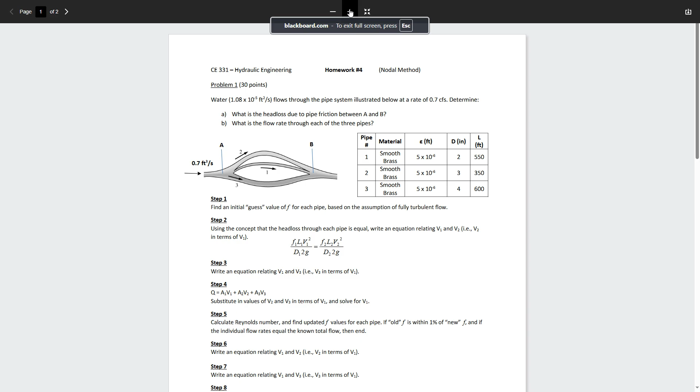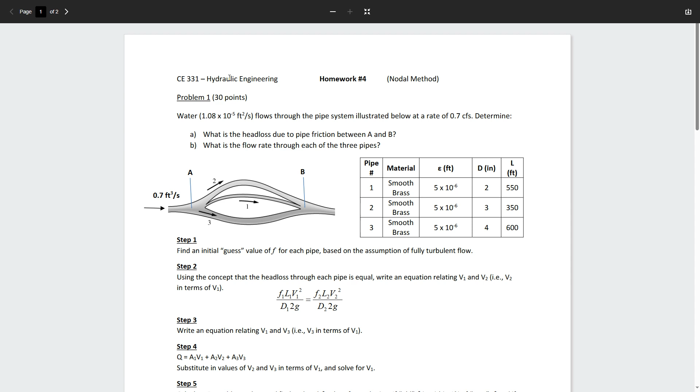Okay, so homework 4 is what you're working on, due at 11 o'clock next Wednesday. Both problems require you to apply the Nodal method, which is what we're talking about today. Homework problem number 1 has a fair amount of calculations, but it's not conceptually very complicated or difficult—just a couple of pages of calculations.

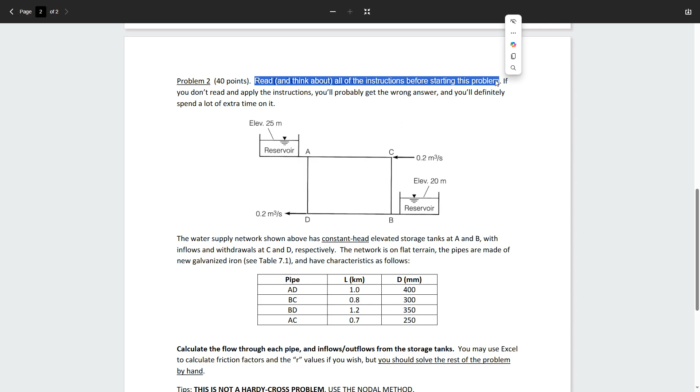Problem 2 is a little more of a brain buster, although that's giving it too much credit—it's not that complicated, really. You just have to do a step-by-step logical analysis. The first part of being successful on problem 2 is reading and thinking about all the instructions before starting. The mistake I've noticed in the past is that students just start doing calculations before bothering with the hints I've given you.

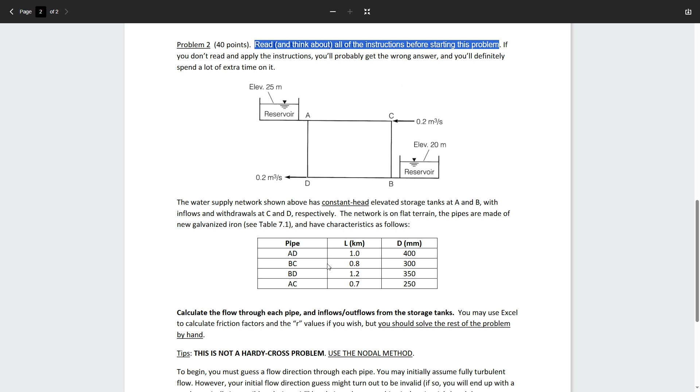This is maybe the 18th semester I've taught hydraulics, and I've assigned this problem many times, and I've seen how people crash and burn on it. In the past it was just the image, the data, and calculate the flow through each pipe. So I've looked at what mistakes people have made over the years and tried to steer you away from the most common ones by giving you hints. Everything you need is in the handout, and I really think it would be wise to read and think about my suggestions before you start the calculations rather than jumping right in.

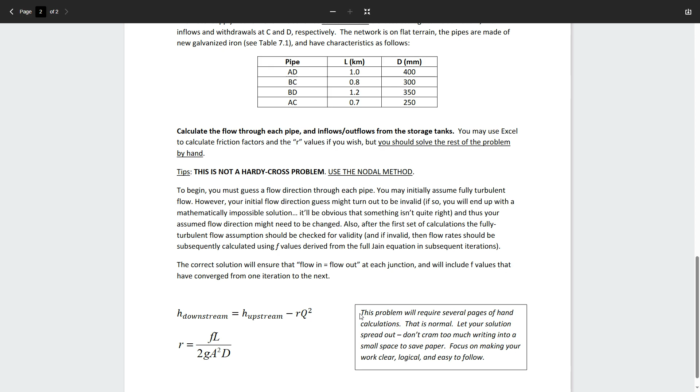The other thing I suggest is that it's normal for this to be several pages of hand calculations—my solution is about 4 pages. So don't try to cram it into a single page with extremely small writing. Paper's relatively inexpensive—let your work breathe, spread out, and give it enough room that you're able to be logical and clear in your presentation of the process.

Hopefully that hasn't unnecessarily intimidated you with the assignment. I don't think it's likely to take you more than 2 or 3 hours. It's a lot of writing, a lot of algebra, and a little bit of logical analysis. Okay, so that's all I want to say about homework number 4.

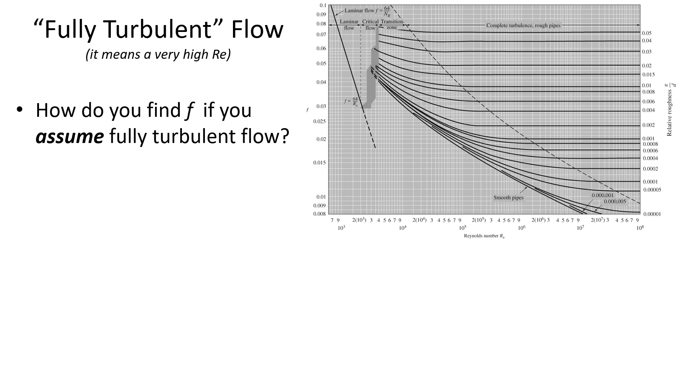This is just a technique we can use to start with a better guess for the F value than picking a number out of thin air. If you assume the fully turbulent flow assumption, then you're taking the Jain equation and removing the Reynolds number term from it, because if the velocity is high and the Reynolds number is high, since this is in the denominator, it becomes negligible. So we can estimate the F value just by taking into account the relative roughness component of the Jain equation.

Or, if we were thinking in terms of the Colebrook equation, again it has both a relative roughness term inside the logarithm and a Reynolds number term. And if RE is very big, then it makes the second term negligible, and then F is just a function of the relative roughness. So you can always just calculate F with this.

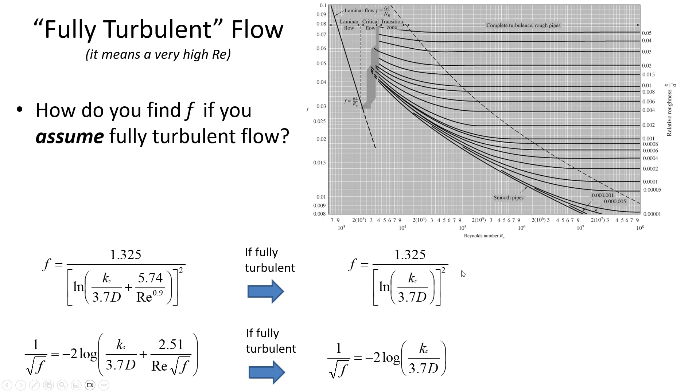This is just like a first draft estimate of F. So if you assume the fully turbulent flow assumption, then at the end of your calculations you need to verify whether or not that assumption is true. Sometimes it will be true, and if you calculated a new F value with the full version of the Jain equation, you'd get the same thing as your first time around, in which case you can stop your calculations.

But there are going to be other cases where you assumed fully turbulent flow, and it turns out the flow wasn't fully turbulent, and then you're going to have to adjust your F value in the second and subsequent iterations. So we've done that before, the idea of continuing to calculate over and over again until the solution converges. It's just your solution will converge more quickly if you start with a reasonable guess of F, and the fully turbulent flow assumption is one way to do that.

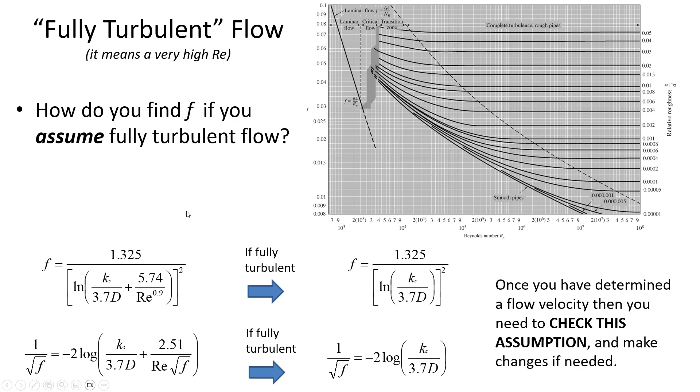Okay, so now let's talk about the Nodal method. This is the heart of today's lecture and your next homework assignment, homework 4. It's an application of the continuity principle.

And the continuity principle is the same one that I invoked when I was talking about flow into a pump. Remember in our last class period, what I said is that a pump adds energy, and the way that it adds energy is through an increase in pressure. Because if we have water flowing through a pump, and the diameter of the pipe is the same, then the velocity in and the velocity out are the same.

because the flow rate in and the flow rate out is the same. So continuity principle says, let's put a little imaginary box through some zone that we're interested in and keep track of the inflows and the outflows. So you've seen the continuity principle before. We're just going to apply it in different ways today.

What we're saying is that we're going to look at a pipe junction where two pipes come together and one pipe goes out, and we're going to analyze the flow in and the flow out of the junction. And what we know is that if it's just pipes welded together or bolted together and there's no reservoir, then there isn't any capacity for storage. And if there's no storage capacity, then the flow in and the flow out have to be equal, because liquids like water are effectively incompressible.

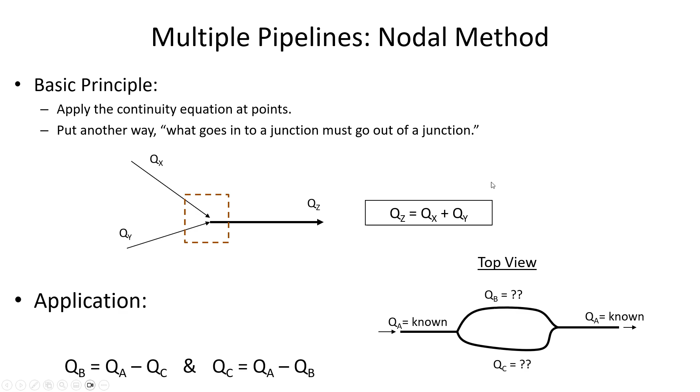A couple of people have been to Winterplace. They're liars, by the way. I looked on their website today. I was interested what their vert is, like from the top of the mountain to the bottom of the hill. They say it's 603 feet. It's not. I looked it up on Google Earth because I was curious. They claim their mountain goes up to 3,600 feet. According to Google Earth, it only goes up to 3,554. And then they claim the bottom of their lift is at like 2997 or something, and even if you ski right next to the parking lot, I don't think it goes that low. So anyways, they're claiming they have like 603 feet of vertical elevation, and more is better.

When it comes to skiing, you want tall mountains because it means you can ski a lot with each run. In contrast, one of the most recent places I've skied is Dubai, which is in the desert. They have an indoor ski resort at one of the malls there. The Mall of the Emirates has an indoor ski resort. I think from the top to the bottom, the vertical drop is maybe 150 feet. It's fun, you can do the run in about 90 seconds, so in a given day you'd go up and down the mountain dozens of times.

But when it comes to skiing outside of the desert, taller mountains are better. Obviously they're bigger, but they're better because you want to get speed, you want to have length of time going down the run.

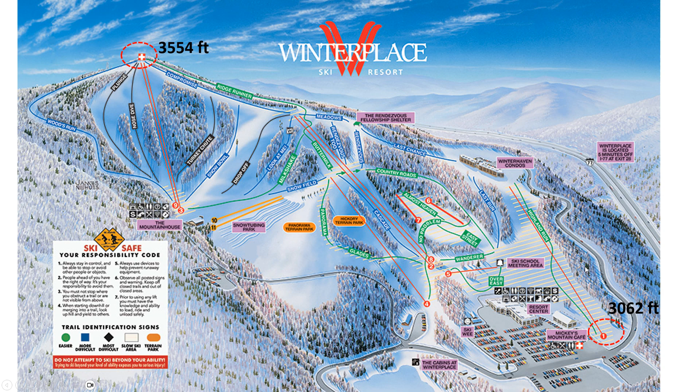So if I'm starting in the same place and ending in the same place, the vertical change is the same as if I went on Ridge Runner and Meadows and Last Chance and so on. So the elevation change is the same regardless of the route that you take.

So they all have different ride characteristics, and you're going to go faster on Nose Dive than on Woods Run, because although it's the same elevation change, Woods Run has a longer length. And the slope is the change in elevation divided by length. So the steeper the slope, the faster it's going to be on your skis, and the harder you're going to hit the ground when you fall off, if you're moving really fast.

Woods Run has a longer length, even though the delta Z is the same, for plunge versus Woods Run. The delta Z is the same. Since Woods Run has a longer length, the slope is less.

But the key analogy I want to make here is thinking about an elevation change. It's the same when you have a starting point and an ending point.

So back to hydraulics. If we have this junction where pipe A branches into pipe C and pipe B, if we're at that junction, then there's going to be the same amount of energy loss if we go through pipe B or pipe C, because they're going to come back together again, and so the amount of head where the two come back together has to be the same.

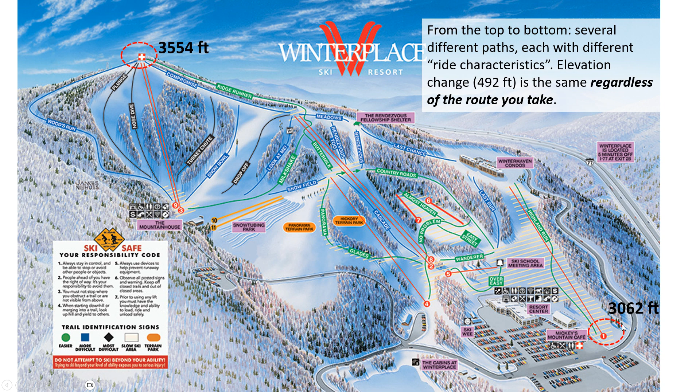So just like with the mountain, it doesn't matter which route you go through, the amount of energy that you've got when you're standing at the top of the mountain, potential energy, and the amount of energy you've got when you're standing at the bottom of the mountain, like represented as your elevation, the change in energy is the same regardless of which route you went to get there. So that is true in hydraulics as well.

So if we can estimate the head loss through a pipe using the Darcy-Weisbach equation, then what that tells us is that for each term of the equation - the F value, the length, the velocity, the diameter, well G is a constant - but for each of these other terms, there could be unique parameters through each pipe while the head loss is the same for pipe B versus pipe C.

So we can find the two things that we would add together to solve the distribution of flow rates: number one, the continuity principle, and number two, this idea that the head losses are the same regardless of whether we go through pipe B or through pipe C.

Does everybody see that idea, that the amount of energy where they come back together again at this junction - you couldn't have a different amount of energy at the end of pipe B versus pipe C. They have to have the same amount of energy because they're coming back together again and forming a single pipe. So they'll ultimately have the same amount of head, which means the head loss through each route has to be the same. Does anybody have any questions so far?

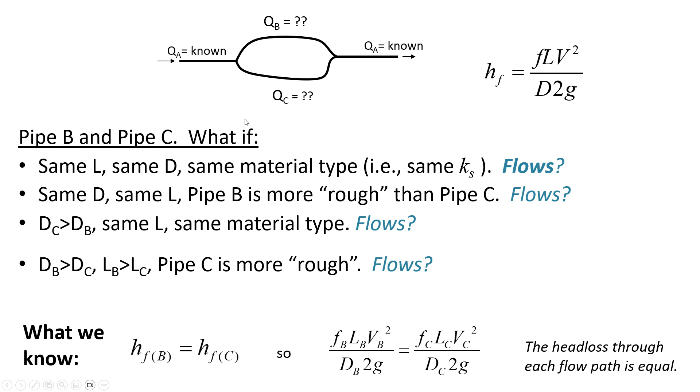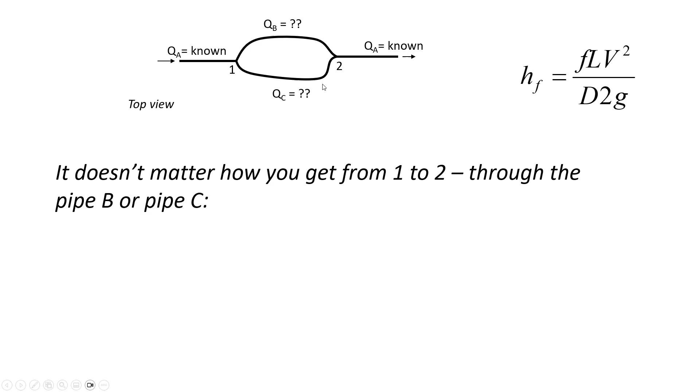Junction 1 is where the pipes split. Junction 2 is where the pipes come back together. And it doesn't matter whether you go through pipe B or pipe C from 1 to 2 - regardless of the route, the head loss is the same.

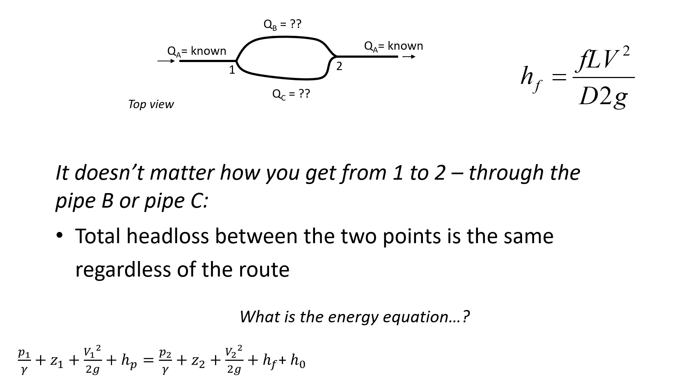So think about the energy equation. Here's the energy equation: pressure head, elevation head, velocity head, plus the pump head that's added between point 1 and 2, is equal to the pressure, elevation, and velocity head plus the losses that occur from pipe friction and local losses.

So the head, when we talk about how much energy is there at point 1, what I mean by head is if you add together the three terms that encompass how much energy there is. And it's just expressing energy in units of length - meters or feet. So it's the pressure divided by the unit weight of the fluid, plus the elevation, plus V squared divided by 2G. All three of those terms have units of length.

We add them together, and what we're saying is that the head at 1 minus the losses through either of the pipes is equal to the head at 2.

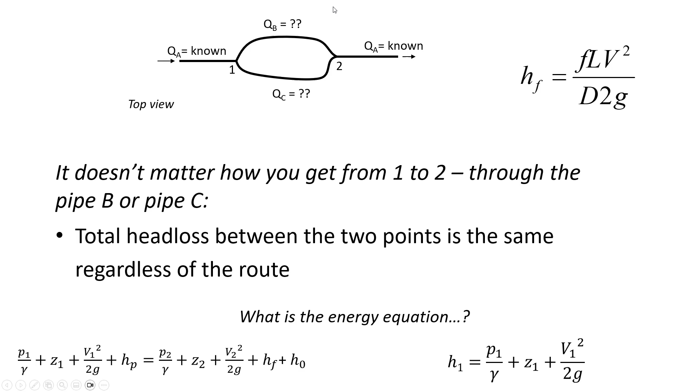This is the energy equation. You probably wouldn't recognize it as the energy equation, but it is - we've just rearranged it a little bit. So H, as I told you, is pressure head, elevation head, and velocity head. So this is just saying the total energy at 2, the downstream location, is however much energy there was at 1, minus the losses, plus the pump head.

So in words, that seems simple enough. The way you describe this in text is: the head at 2 is equal to the head at 1 minus the friction losses, FL divided by D - that's related to the friction component - and we know that the sum of K naught is talking about local losses.

So if we add up FL divided by D and the local losses, we can multiply that by the velocity head, because both the Darcy-Weisbach equation, H sub F equals FLV squared divided by D2G, and the head loss due to local loss, which is the sum of K times V squared divided by 2G, share a common factor - the velocity head, V squared divided by 2G. So you could combine FL divided by D and the sum of local losses, which is why we've got these in parentheses, multiplied by that common factor.

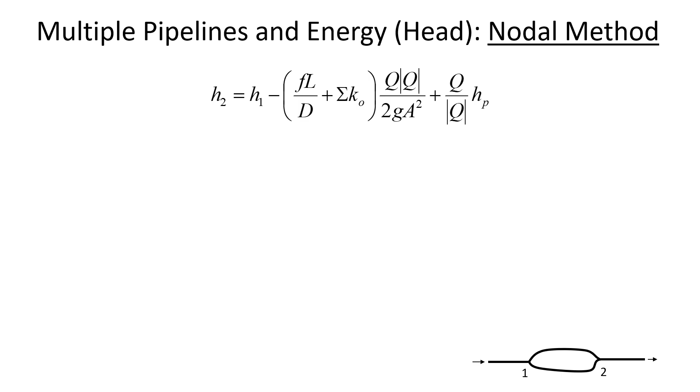So what's this equation? It's the energy equation. It's just kind of rearranged for our purposes. But for the nodal method, this can be a useful way to calculate the change in energy between 2 points using the nodal method. So here's all the definition of the terms.

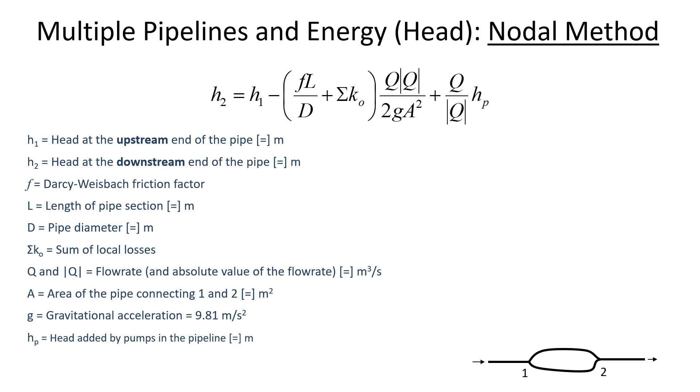The thing that's really important to emphasize is that location 1 is where the water flows from, so it's at the upstream end of a pipe, and location 2 is at the downstream end of a pipe. So 1 and 2 have directional significance.

Okay, so let's try this with an example. Let's figure out for this flow network where we've got 3 cubic meters per second going through pipe A, and then the pipe splits. We want to know how much flow is going through pipe B versus how much flow is going through pipe C.

And then also, using this method, we could find out what is the pressure at junction 2 where the pipes come back together. So if we wanted to solve a problem like this, our process is going to find out how much head there is to begin at the upstream junction, so find the total head at 1 by adding together the pressure head, the elevation head, and the velocity head.

And then you'd find the head at 2 in terms of the unknown flow rate through B, find the head at 2 through the unknown flow rate through C, and then set them equal to each other by equating the flow rate through B in terms of the flow rate through C.

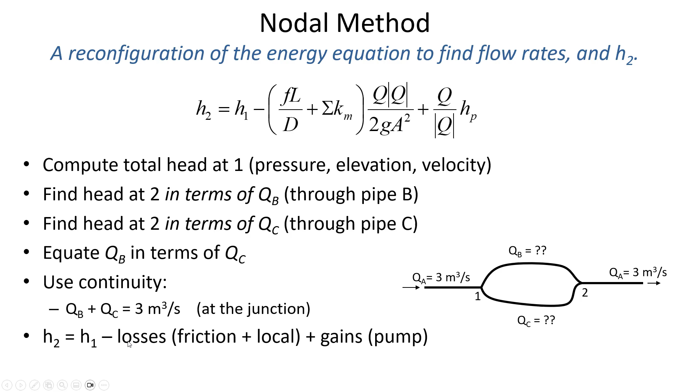Because the 2 equations we're going to use are continuity, the fact that the total flow has to equal 3 cubic meters per second, and the knowledge that the head loss through B will be equal to the head loss through C. And so we could then find out how much head there is downstream at 2 by subtracting out the losses from the original head that existed at 1.

Okay, so let's work this example. You can see I've given you some things here off to the right. I've given you the reminder that the head loss through pipe 2 is the same as the head loss through pipe 3. We know that the starting pressure here at junction A is 900 kilopascals. We've got the pipe lengths. We know that everywhere is galvanized iron pipe, so we could use that to estimate our F values initially.

We can actually find out the relative flow rate through pipe 2 versus through pipe 3 even before finding out what's the head at B. We can find out the relative proportion of the flow rates through each of them without having to know the flow through B.

But let me suggest, first of all, let's assume fully turbulent flow. So calculate the F value that should be used for pipe 2 and the F value that should be used for pipe 3. Here is the abbreviated Jain equation for the fully turbulent flow assumption. Estimate the F through pipe 2 and the F through pipe 3. And then once you've done that, we'll continue the calculations together.

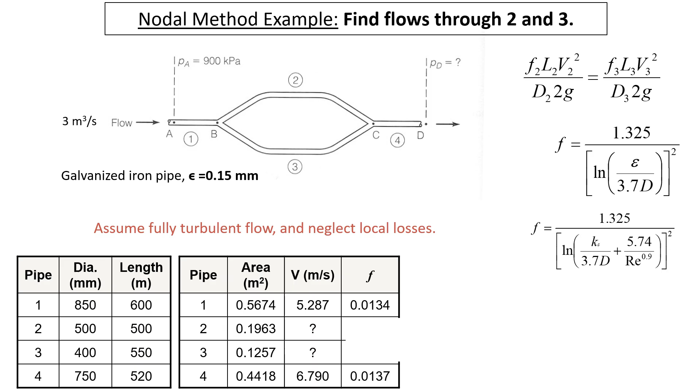Okay, so if you apply the fully turbulent flow assumption and try to calculate the F value for pipe 2 and pipe 3, here's what you end up with. You're substituting the relative roughness into the abbreviated Jain equation, where we've taken out the Reynolds number component, and you get 0.01493 for F2 and 0.01567 for pipe 3.

We need those because we're going to put them into this expression over on the whiteboard: the head loss through pipe 2 is equal to the head loss through pipe 3. That's the governing idea of our problem solving strategy—the amount of energy lost through each of the pipes is equal.

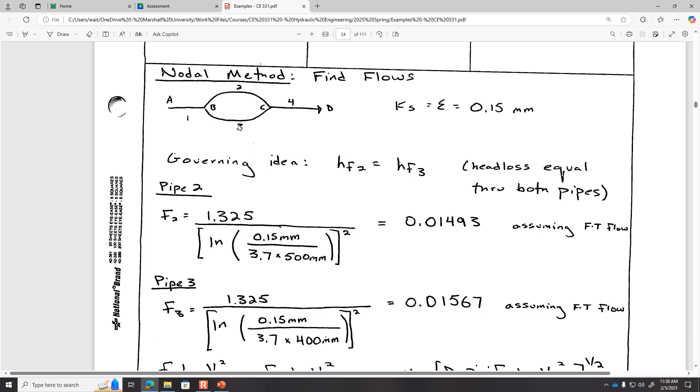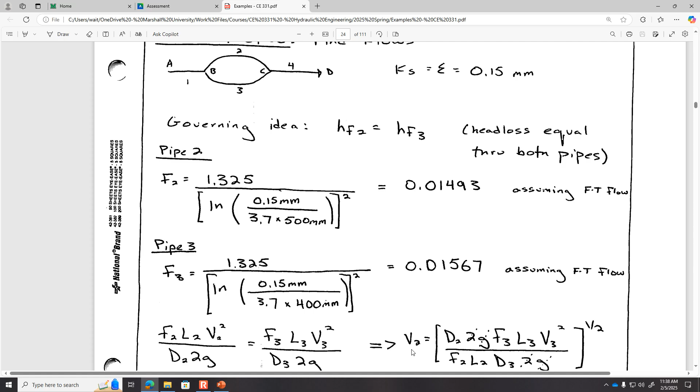So if the head loss is the same through each pipe, here's us setting the Darcy-Weisbach equation for pipe 2 equal to the Darcy-Weisbach equation for pipe 3, and then rearranging so that we've got the velocity of one pipe in terms of the velocity through the other—rearranging and isolating V2 in terms of V3.

So what we get, substituting it in, is that the velocity through pipe 2 is 1.204 times the velocity through pipe 3. So the velocity in pipe 2 is faster than the velocity in pipe 3, since in the given data we knew the diameters and the pipe areas.

Now here's the continuity relationship. It says the flow rate through pipe 2, Q2, plus Q3, is equal to 3 cubic meters per second. The upper pipe plus the lower pipe equals 3 cubic meters per second. Let me draw it on the whiteboard: they come together, and what goes out is 3.0 cubic meters per second. Here's Q2, here's Q3—together they equal 3.

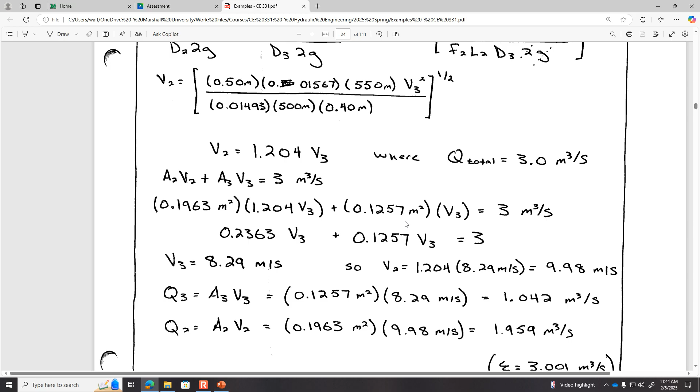Since we used the fully turbulent flow assumption, we have to check to see if it's valid. It may not be. So anytime you use the fully turbulent flow assumption, you have to check the validity of it. So what that means is, now we've got velocities, let's actually find out, using the full version of the Colebrook equation, what the F value is.

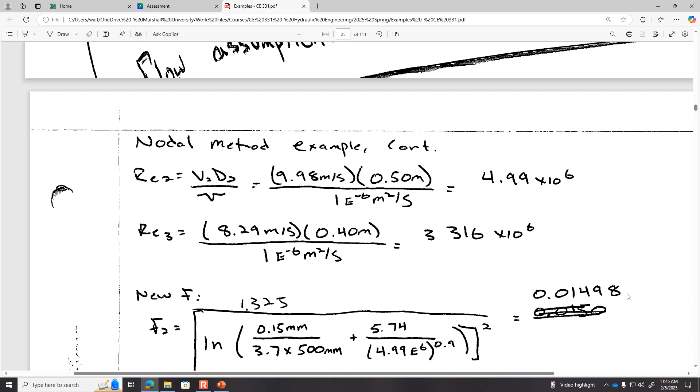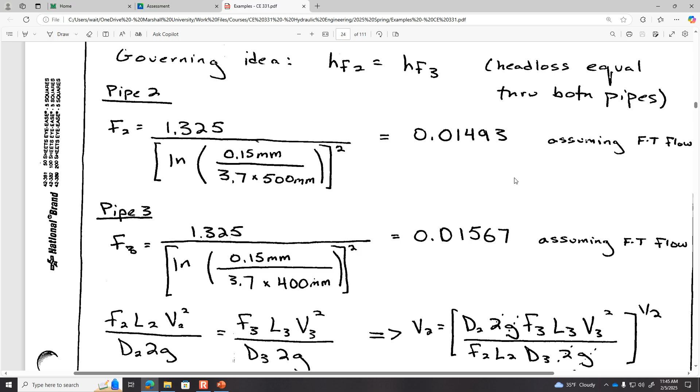Let me demonstrate that for you. I used the Reynolds number for pipe 2 and pipe 3, and I calculated a new F value using the full version of the Colebrook equation. So the new F value is 0.01498. And what was our original guess for the F value through pipe 2? 0.01493. 1493 versus 1498, that's pretty close, so I think we're good with pipe 2.

The fully turbulent flow assumption is valid because if it's a 1% difference, there wouldn't be any reason for reiterating another calculation step. And how different is this? 0.01498 versus 0.01493, divided by 0.01498, times 100 — it's 0.3% different. So that's below the 1% threshold, so the fully turbulent flow assumption is valid for pipe 2.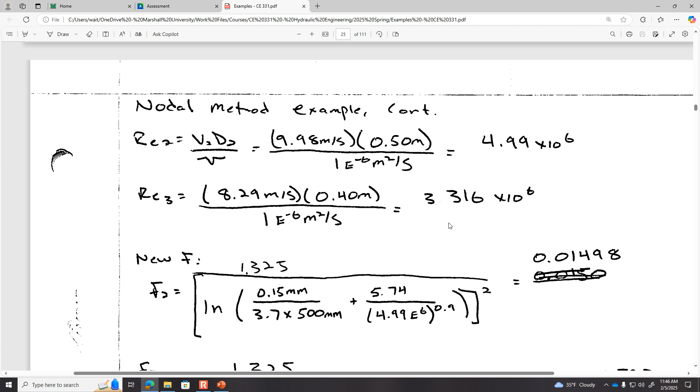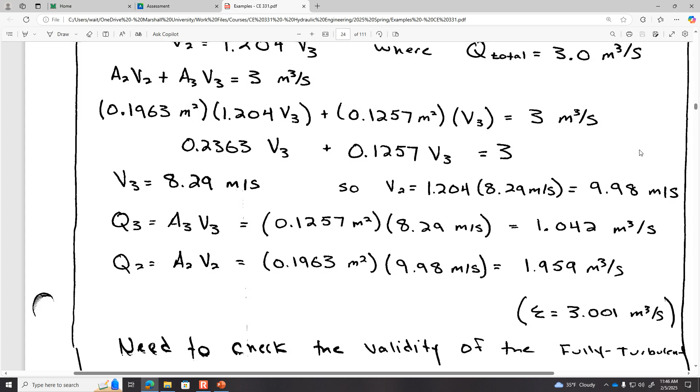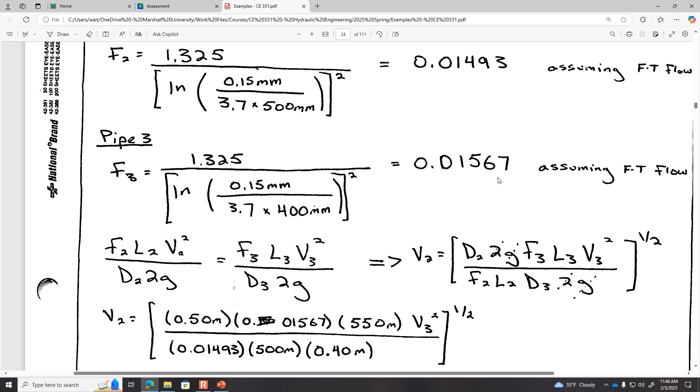Okay, what about pipe 3? When we calculate the full version of the Colebrook equation, the F value is 1592 versus our original assumption of 1567. Let's check that again: 1567, 1592 — that's 1.6% different. I guess if we were being really meticulous, we'd maybe do another iteration, but 1.6% is pretty close to 1%, so that's probably okay, no need to iterate another time.

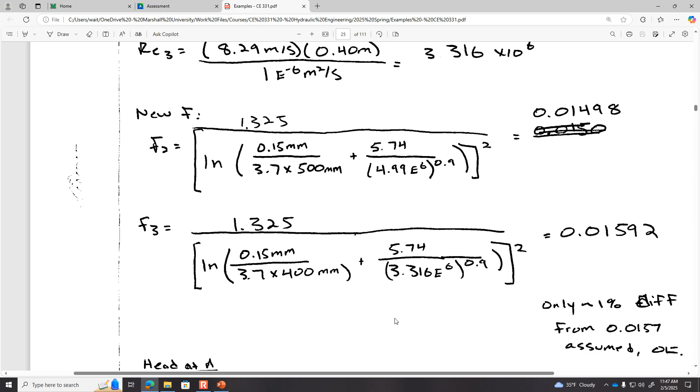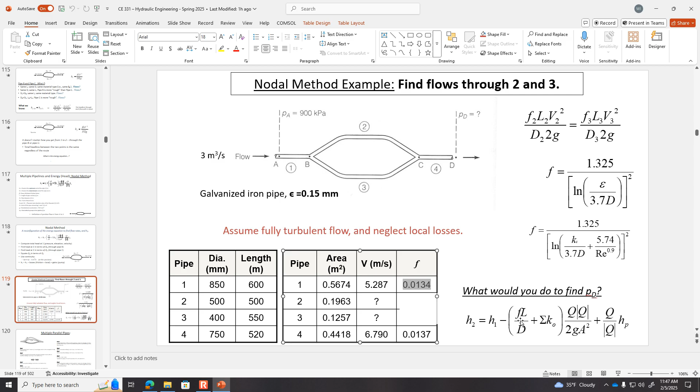But what if we wanted to know how much head is there at these different locations? So we'd start off with how much head was there at A, and then with the given pipe characteristics between A and B, calculate the losses. Here we know the F value, that's given, so you could calculate how much head loss is due to pipe friction, and then how much head is there at B. Finding the loss through each subsequent pipe would allow us to find the pressure at D. If all the elevations were the same, that would be relatively easy, but even if we know the different elevations between points A, B, C, and D, we could account for that by including it into the energy equation.